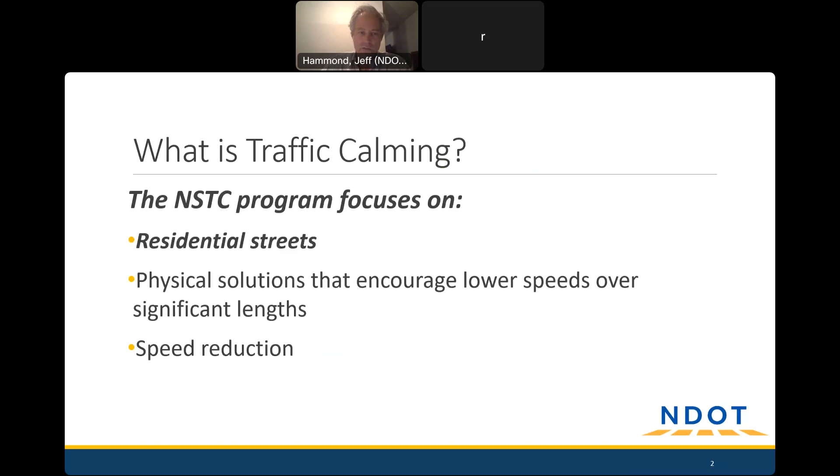We focus this program on speed reduction. We're trying to deploy measures in the streets to counter some of the fast conditions we've seen. This is an application-based program; someone has applied from the street, and we'll talk more about the data in a minute. We focus on engineering, on putting things in the street. The police department is who writes tickets, we don't do that. We do have a few education tools, but we know these three E's work together if we're going to have the safest streets possible. We just focus on the engineering part in this program.

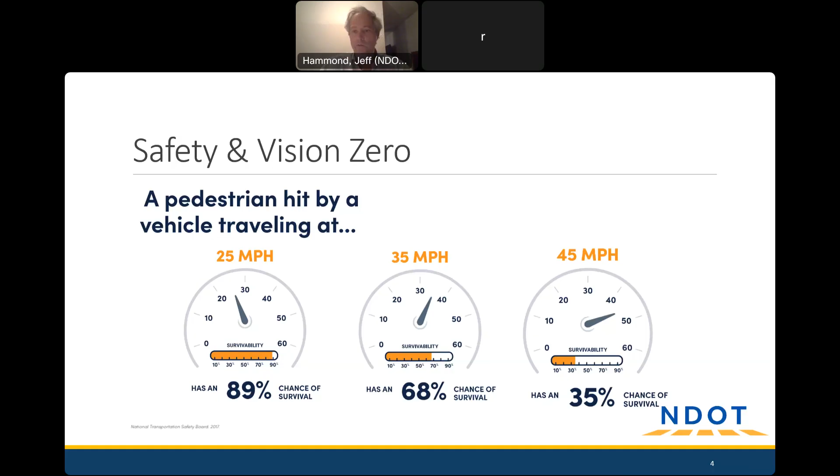Here's one reason why. We know safety continues to be a top priority, a hot topic in our industry, because at least since 2020 we've seen some pretty noticeable shifts in crashes, particularly dealing with pedestrians and other non-motorized users. You see some information here dealing with survivability of a crash when speeds are low. That's one reason we're really focusing on speeds in neighborhoods.

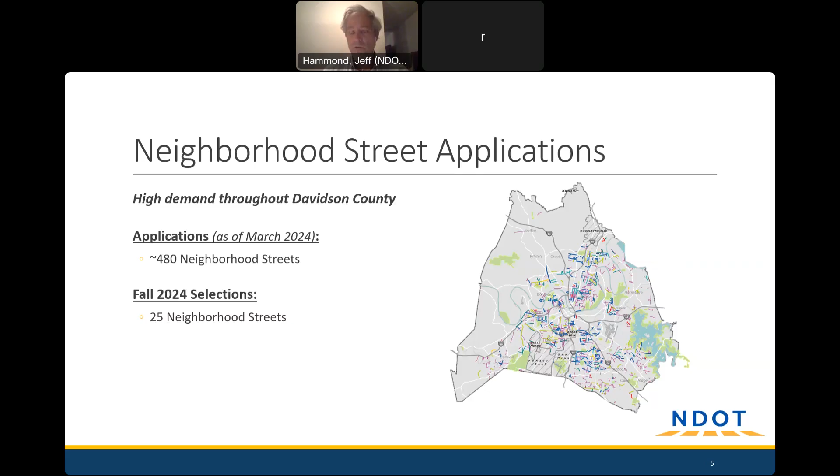This continues to be a really popular program across Davidson County, offered by NDOT. You can see the number of applications hovers right around 500. A lot of those are carryovers from previous times, but there's a lot of demand. So if you're having these problems on Russleo or any of our streets, you're not alone, unfortunately. It's nothing specific to your street, but we've noticed by the fact you've been selected that it does rise to meet some of our thresholds for beginning a project, and that's what we're here to do. With roughly 500 applications, we're only able to do about 50 a year, 25 in 2 different windows, and Russleo is part of that number currently.

We do like to remind folks of Hub Nashville. It's another great resource available for us as residents of Davidson County. Any kind of service request, not just related to transportation or NDOT, but most departments are represented there. Hub.Nashville.gov is a great way to start that request. You can also just pick up the phone and call 311. But this is how this street and all of our streets get inducted into the program.

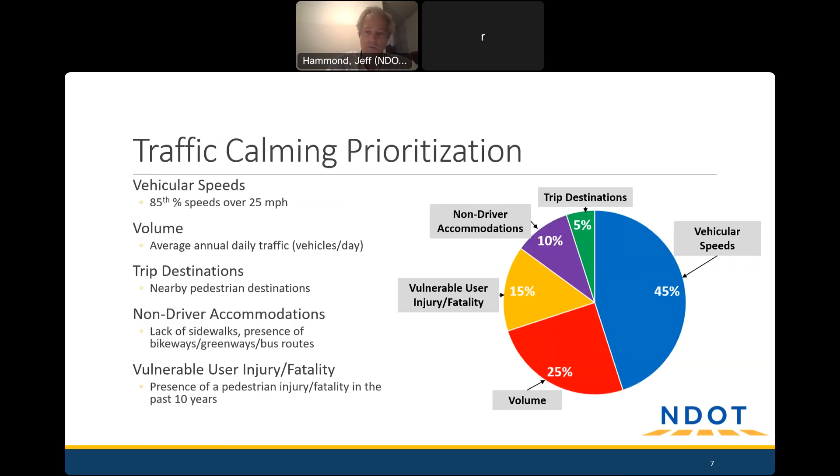Anytime there's an application, twice a year we will go out and take data measurements on all these streets. We're looking for things like the amount of traffic on the street and how fast that traffic is moving. But we're also looking at things like, are there sidewalks on the street? Is there transit service nearby? Also, is it in an area more conducive to pedestrian activity, like are there schools, parks, or libraries nearby? We look at all that data, roll it together, and come up with a composite score, then rank those all the way down the list. Unfortunately for you, Russleo made it into the top 25 for this round, and that's why we're looking at it for a traffic calming project.

We'll look at this in map form, but we are going from Fleetwood to Charlotte. The 85th percentile speed, which is a statistical way we in our industry look at speed, is 38 miles an hour.

That means that of all the cars traveling on the street, 15% were going faster than 38. It could have been 40, 45, or 50. We just know it's faster than 38. That lower threshold is what we look at in relation to all the other streets we measured.

The volume is pushing 2,000 cars a day. That sounds like a lot. It's a fair amount of traffic, but nowhere near our upper limit of about 5,000 cars a day. We do this type of traffic calming on streets up to that much, so it's well within our guidelines for a project like this.

It's about a 20-foot wide street. That's pretty narrow by metro standards, but it doesn't present us any real difficulties. It just helps us tailor a project to meet the needs of a street like that.

This is a pretty short street, or at least a short segment we're looking at, about a third, just under a third of a mile long. We know Russleo is an extension of Knob Road, and Knob Road received traffic calming a year or so ago, so we're treating this as the final piece of that street.

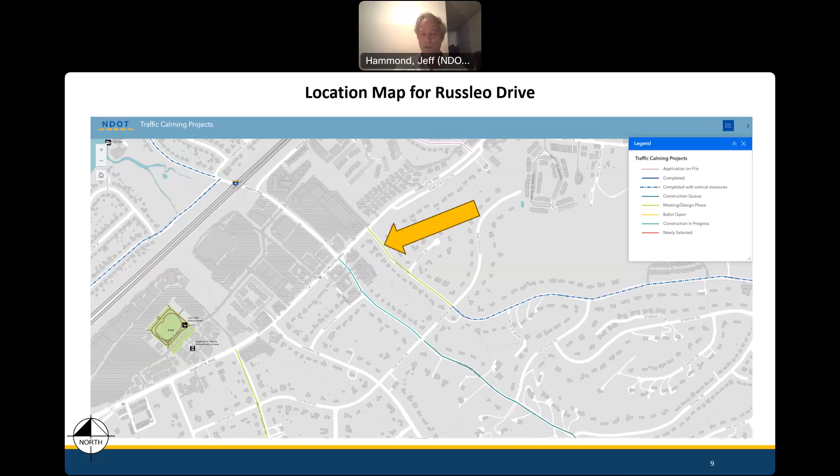This is an interactive map available on NDOT's traffic calming website, so you may find it interesting to zoom around. You can look all over the county at where traffic calming is currently being planned. You don't see any here, but there are some purple lines on this map that indicate traffic calming has been applied for but not selected at this point. It hasn't been prioritized.

A few of the tools we have in our toolbox: the first is really the bread and butter of this program, the speed cushion. People are now generally very familiar with these. Those of you living on Russleo are, because of the installation we've done on Knob Road and others. O'Brien is just across Charlotte, and there are some others in your area as well.

We have some flexibility or design choice when it comes to the length of the speed cushions. That has to do with how fast you can comfortably drive over them. The shorter they are, the more aggressive they feel, bringing about a slower speed. The longer ones, up to 14 feet, have a more gradual, softer feel, but that means people tend to drive a bit faster over those.

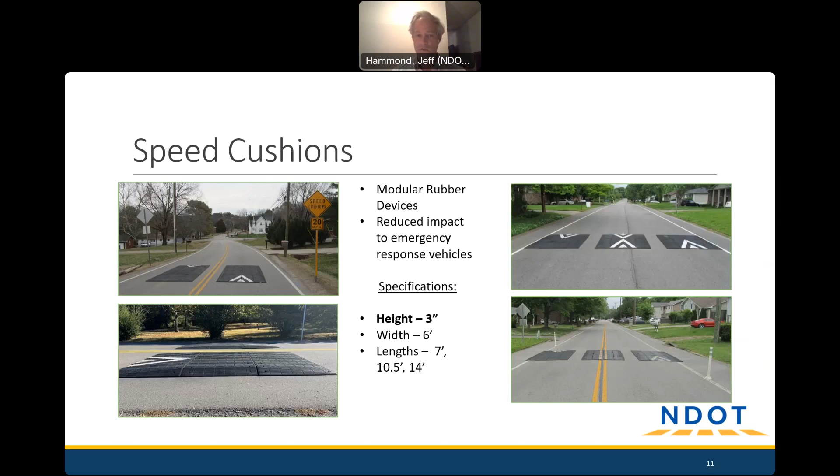A close cousin to the speed cushion is the speed table. This one we keep in the toolbox, but we don't use it very often.

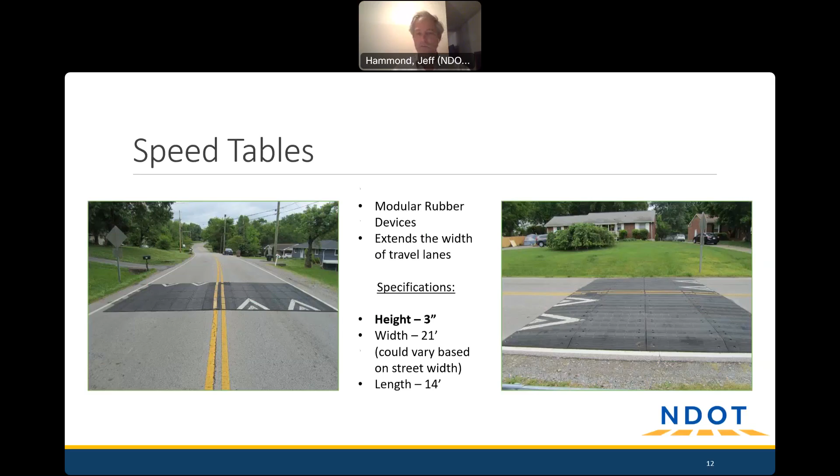I failed to mention the main reason we use a cushion over a table: the gaps in the cushion that you don't have in the table allow wider wheelbase vehicles like ambulances and fire trucks to have less impact when driving through your street. That's why we typically use cushions far more often than not. But the table might have its place - we see them in parks and places where emergency response is not as critical.

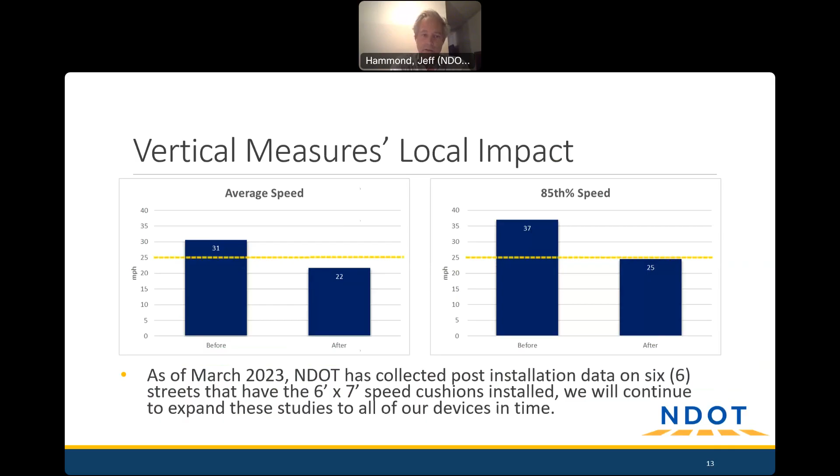We do have some before and after data. I always caution folks, it depends on the street, the configuration, and how fast traffic was traveling to begin with. But we are seeing very good results using speed cushions, on the order of 9, 11, 13 miles an hour reduction, something like that on average. Again, it just depends on the application.

One of the tools we have, which you're familiar with from the project on Knob Road, is the radar feedback sign. This falls into the category of providing education to folks. It does what it says it does, gives you your speed read back to you as you drive past. It just serves as a good reminder if you are speeding that you are in fact going a little too fast, and hopefully would slow down.

We'll use these, and the reason why we use them on Knob Road is a good example, where a speed cushion just doesn't work as well for us, things like steep hills or sharp curves. In some cases we're dealing with more dense streets than you have in this neighborhood, with a lot of driveways, so to avoid putting a cushion right in front of somebody's driveway, we may opt for a feedback sign instead.

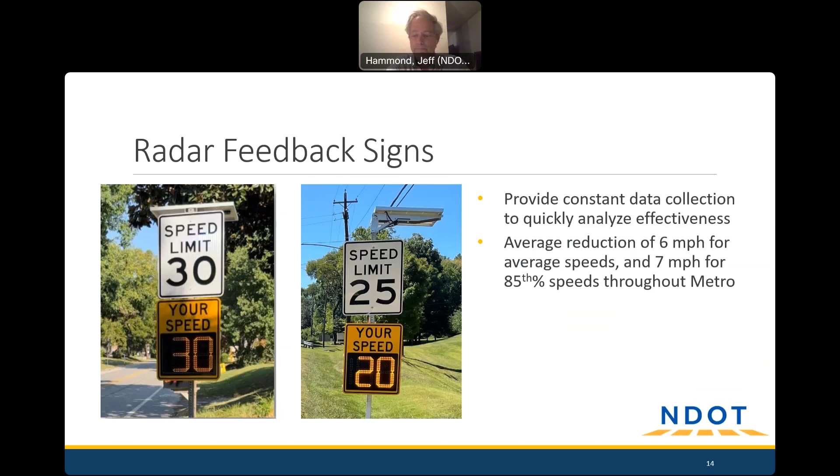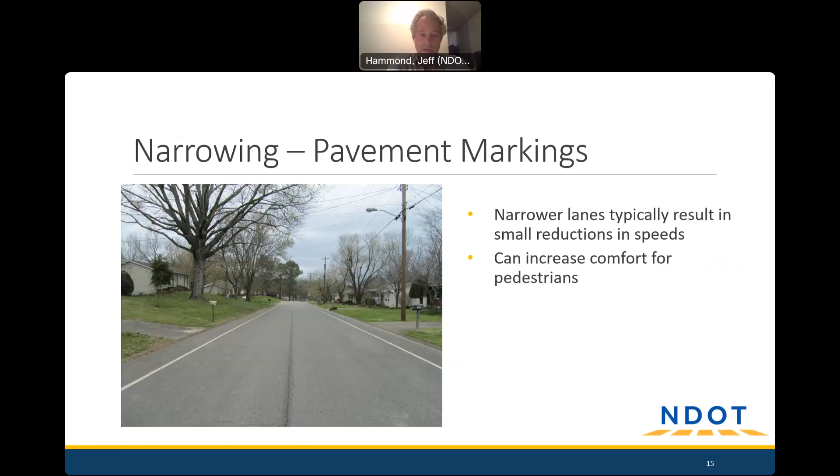We do have some capability of doing pavement markings when we think that might help. In most cases, the wider the pavement and the more open it feels, the faster speeds we will see. So sometimes we'll introduce edge lines or a center line if we think it'll visually narrow that road and make it feel like it should be slower. That will happen on occasion.

In more urban areas, and maybe where there's more pedestrian activity, we'll take that a step further and really use pavement markings to delineate a narrower street at intersections. We call those bulb-outs, where we try to visually make the road feel narrower. That also has the effect of shortening the crossing distance for pedestrians trying to walk across those streets at that intersection.

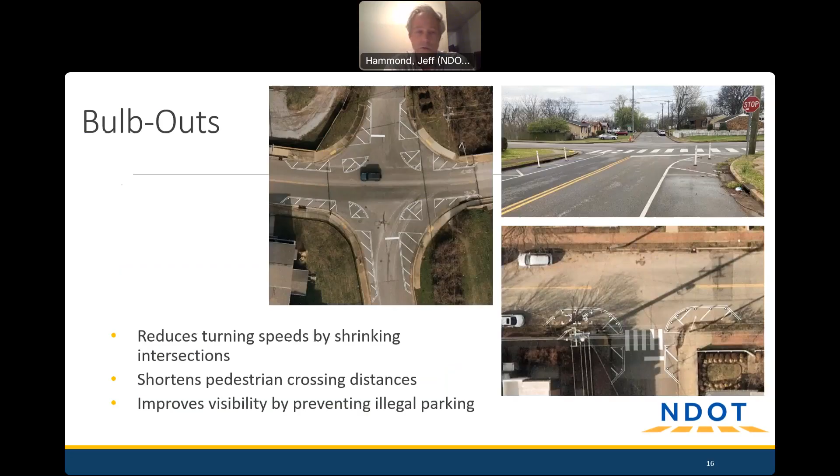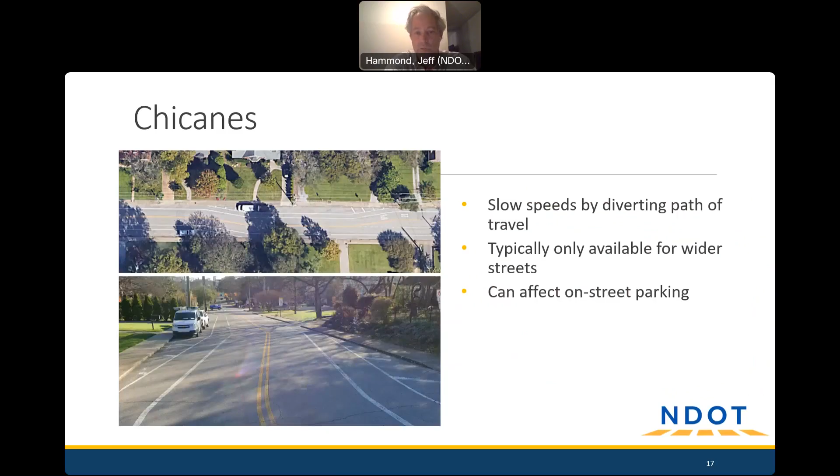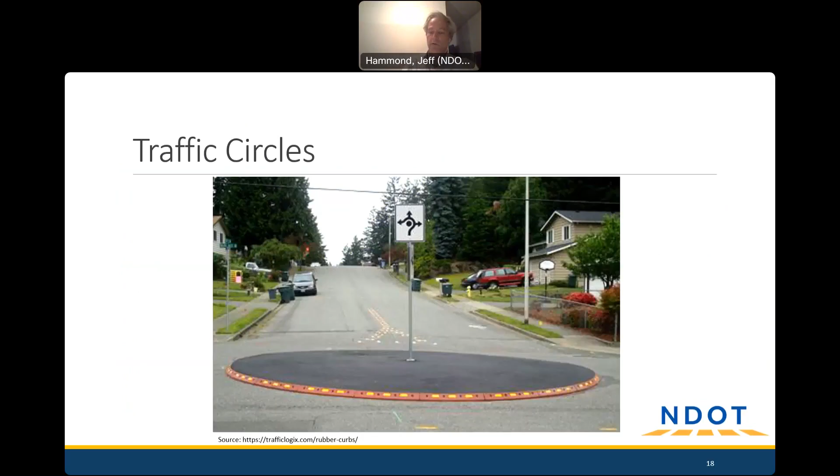And then one that we will bring out from time to time, under some special situations, is the traffic circle, if we're trying to calm two streets that might intersect, for instance. This can be a good tool, but it takes an awful lot of pavement. They have to be very big intersections, and we have to carefully consider large vehicles like school buses, which sometimes have trouble navigating these. But it has its place.

So here's the plan for Russleo. It's kind of boring, but that's pretty typical for a lot of projects where it's really a speed cushion based project. We do that because they're shown to be very effective. The cushions hold up well, people know what to expect, they're kind of used to them, and so we like that consistency. This is representative of probably 95% of the plans that we're putting out there.

Again, as I mentioned, in this case this one would really work and feel like a pretty natural extension of the Knob Road project that comes in from the right side of your screen. Charlotte is on the left side of the screen, running north-south. So we don't have anything too close to the stop signs.

The plan really just consists of two sets of speed cushions spaced appropriately. We think those two sets will give us about just under a 500-foot spacing, which our experience tells us is just about right. It's not too far apart that people will really speed up in between the sets of speed cushions, but they're not so close together that it feels totally obnoxious for those of you who have to drive across these every day. We typically see people not diverting onto another parallel street to avoid them. So it's kind of a balance on the spacing.

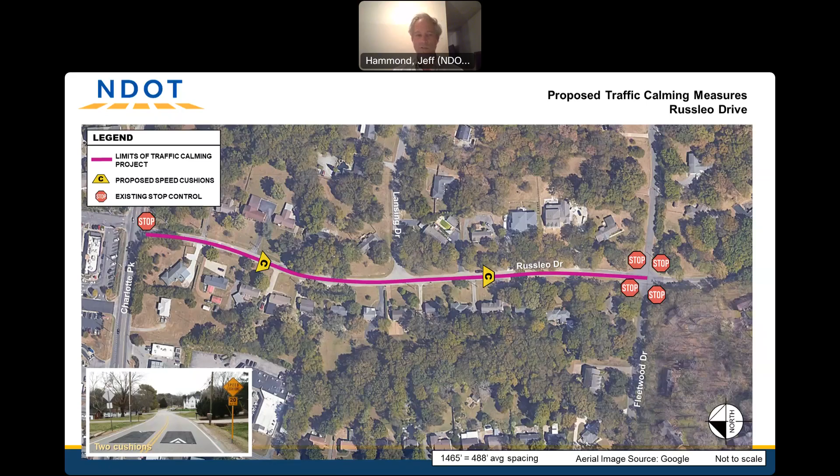So you will have access to those. We will upload those to our website where folks will have an opportunity to see those. We can come back to a second neighborhood meeting. We have that available. We typically don't need to on a very basic plan, but if there's more questions or ideas for different things you think we should be doing, we're happy to take that into consideration and come back as needed. In most cases, after those design plans are uploaded to the website, we move into an online ballot process that takes about 6 weeks.

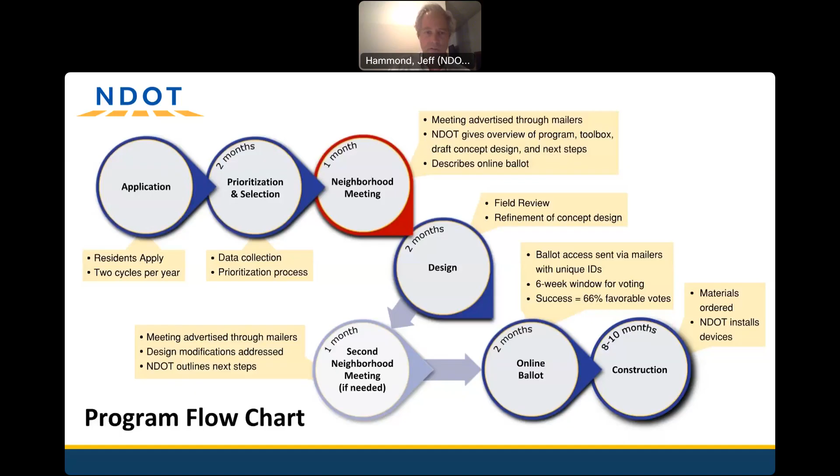I want to talk a little bit more about the ballot process. That usually gets some questions. When it comes time to vote after those plans have been uploaded to the website, we will send out another card like we did for this meeting that will have a unique code on it, and a link to an online ballot page hosted by Nashville.gov. You'll just go in there and put your information, your name and address, and whether you're for the project or not. We keep that open for 6 weeks.

At the end of those 6 weeks, we look at those responses, and if 2/3 of the respondents have voted in favor, we'll move the project forward. If not, we won't. But it's important to know that that's 2/3 of just the people who respond. We're not looking for a set number of people to vote. Just like a real election, it only counts if you vote.